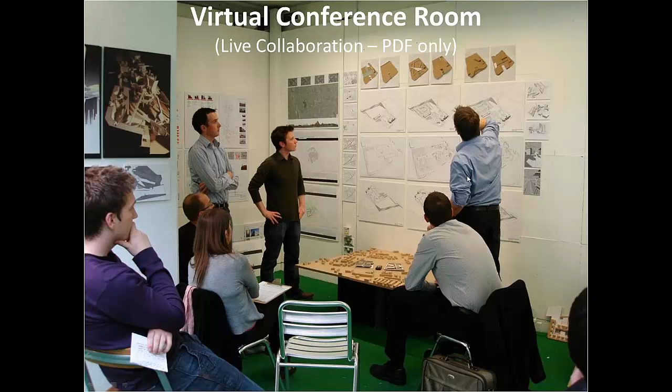In the case of a studio session, this gentleman could be in New Orleans, this lady could be in Boston, this gentleman could be in San Francisco. We're all coming together virtually on the cloud to do the same things we would do inside a conference room. And just like a conference room, we can meet simultaneously and interactively markup documents live and see what each other is doing.

Or we can leave the conference room, or leave the studio session, and the documents that are part of that studio session will remain there, and people can come and go as they please and make comments and markups on various documents.

And it doesn't matter whether we're meeting interactively together or doing it in this asynchronous way—whoever said what, when, to any of these documents is captured, tracked, and made part of the PDF for future uses. Just a brief summary of some of the markup tools available, in this next series of slides.

There are obvious things like placing text and using pens and highlighters. You can place clouds, and what they call call-outs, which are clouds with notes associated with them. You can establish stamps like 'release for construction,' 'not to scale,' whatever you want—you can create a stamp for that.

There are powerful measurement tools, so if you open a PDF document that has some dimensions drawn on it but wasn't plotted to scale, you can calibrate a scale by simply clicking on the document and saying between here and here is 15 feet. It will remember that as you begin to do square footage calculations, perimeter measurements, or area measurements. You can even add a Z depth to do volume calculations in addition to area calculations, and so on.

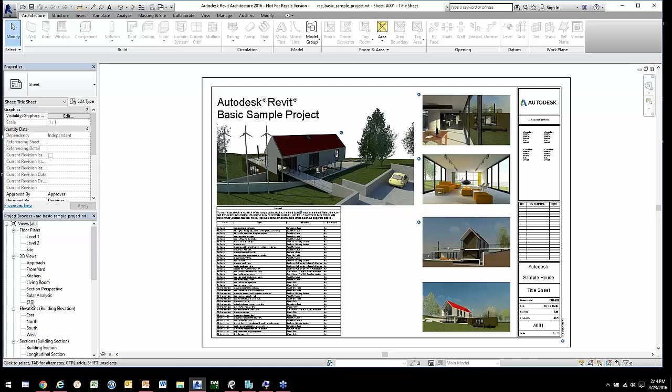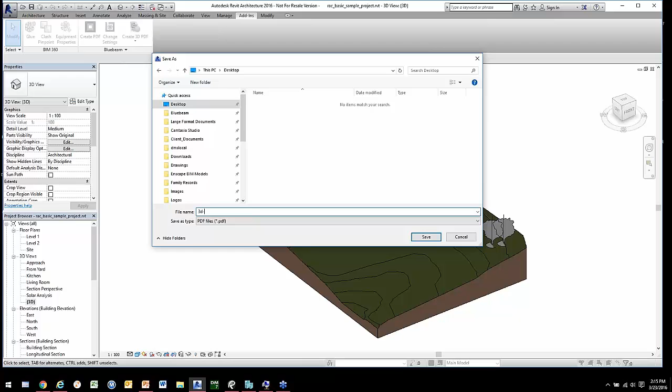So in here, I'm going to go to the 3D view and show you one of the first integrations with Bluebeam and Revit, and that is the ability to extract a 3D model as a 3D model. If I go to add-ins, all I have to do to create a 3D PDF of this is simply go to the pull-down menu and say create a 3D PDF. It's going to say where do you want to put it. For my purposes here, I'm just going to shove it on my desktop for now, and I'll say that this is going to be a 3D model, and I will generate a PDF of that. Now, this is a true PDF. It could be sent to anybody, but it is being written to my desktop as we speak right now.

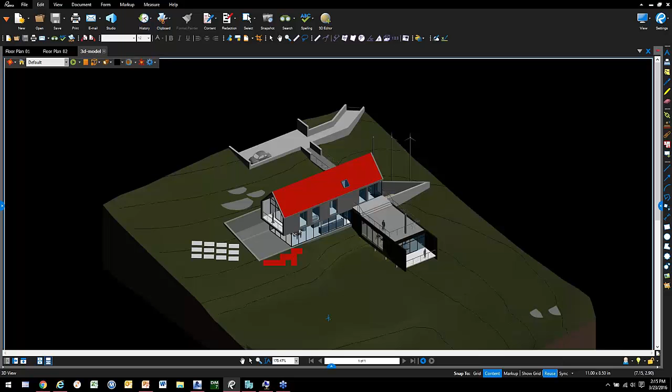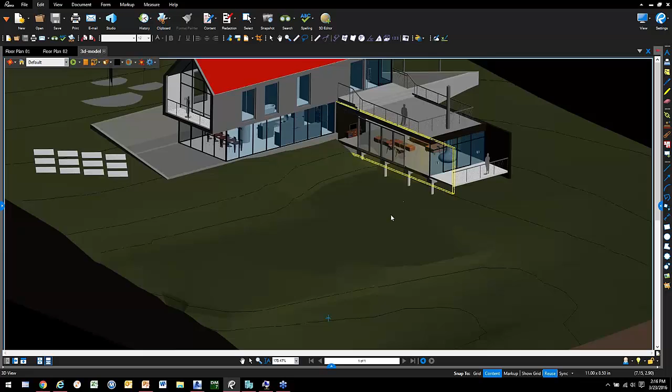Now, I've done some testing with this, and just for your information, what I've seen as a general result is this 3D PDF is roughly 25% of the size of the original RVT file. All right? It is fully rotatable. As you can see here, I'm spinning this thing around, in and out, and zooming in and so on. It also has capabilities like, for example, I can click on any of these objects. I can right-click and say I'd like to hide that object, so that as I am zooming in and out or trying to see inside of the model, I can very selectively choose what it is that I'm after. And it also has the capability, I'll zoom out a little further here, to do things like cutting planes.

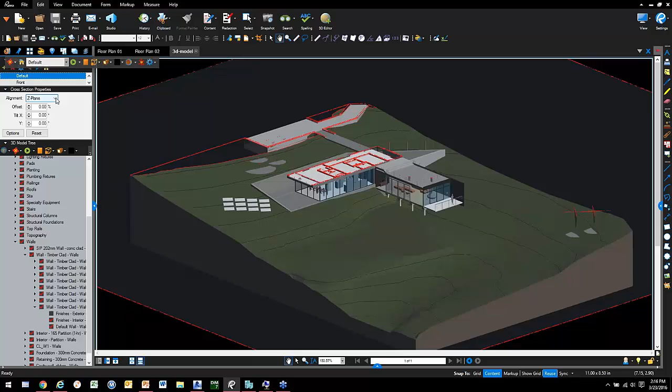What I'm going to do is turn on the cross-section properties, and you see it's automatically going to a Z value plane, and then I can move that up or down depending on where I want to cut through the building, or I could change that to an X plane or a Y plane, or you could do what they call X flipped, so that you can see it the other way around,

and again continue to cut these cross sections through it. And then any one of these images that you see here, you would be able to right click on that and say that you'd like to do a captured image of that. Say perhaps you want to email a graphic of that.

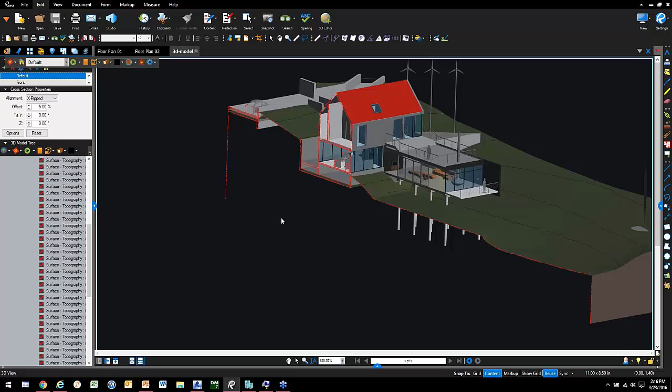A lot of people are unaware of the fact that you can mark up a 3D model using these utilities. So if there was something about, let's say this ottoman, this brown ottoman here, I can place a cloud around that, and I can place some text associated with that, and I'll say replace with leather, for example. Now, that markup is part of this 3D model here.

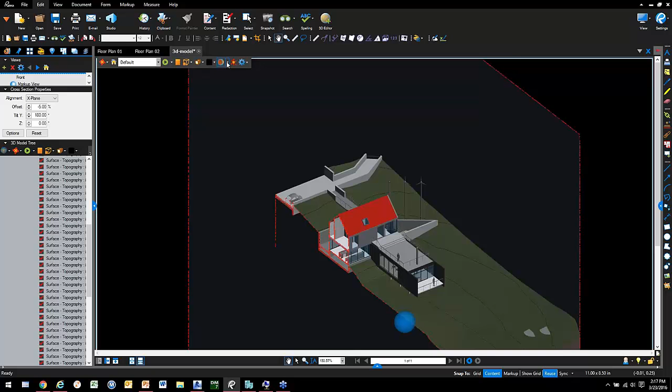So if I go back to the standard view and I choose to turn off, say, the cross sections and so on, notice how my markup, if I zoom in and out or rotate around, my markup becomes this blue sphere, and there could be many of those throughout the model.

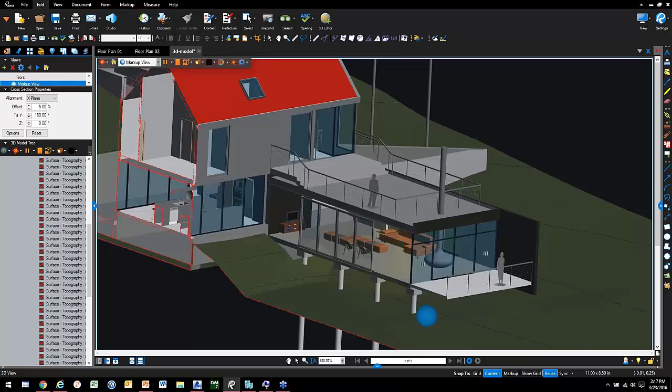The way Bluebeam Revu works with this 3D model capability is if you click on the sphere, it automatically remembers the view orientation and all of the view settings that were enabled when that markup was created, and it will automatically reorient the model so that the attention is immediately drawn exactly to the comment that was there.

And like any other markup, it is listed in the markup list as to who placed which comment when it was done, and then there's a whole series of variables that you can associate with it to do material takeoffs and responsibility lists and so on.

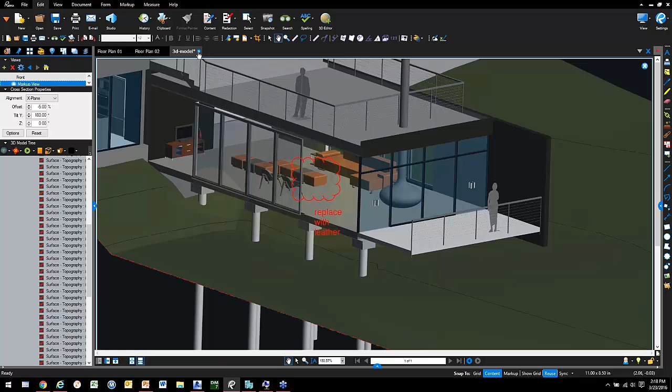But that's just one example, and I'm really not even going to keep this 3D model. I'm just going to kill it here and say, would you like to save it? No. And this is a floor plan that's already open in Revu. Now, I'm going to go into another model in Revit. First, I'm going to pop over here and just kill the entire session.

This drawing came from a Revit model, but instead of dumping a 3D model, I went to the floor plan view, and I said I'd like to extract one of these floor plans. And then from there, I began to mark it up with room lists and punch list symbols.

And if you're using the iPad version, or even the desktop version, if you've captured photographs that are on your hard drive or accessible to you, when you're doing your comments and markups, you can also include graphics. And in this case, the punch list said there was a wall tape joint visible that needed further work.

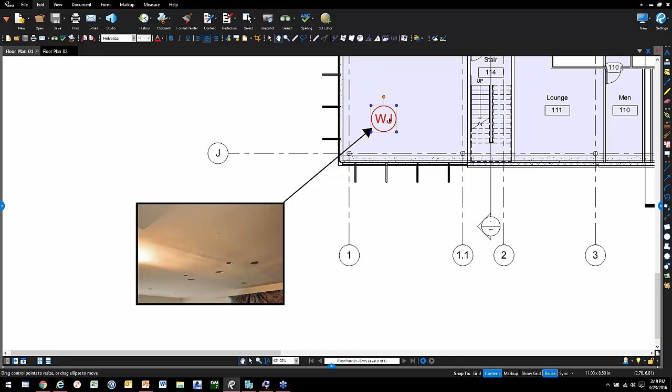If I go to the properties of that markup, that's been assigned to a contractor called Johnson's Drywall, and I've even included a photograph of the problem that I need this particular contractor to deal with. And then again, this is a standard PDF that can be shared with anyone.

So if I chose to do so, I could simply say, let's email this to whomever, and I can go into my distribution list and contact list, and I can say, I want to send this out to Johnson's Drywall. But more likely, what I would want to do is maybe my email says, hey Randy, we need to talk about this.

Tomorrow at 2 o'clock, meet me online in one of our studio sessions, and let's talk about it interactively and decide what to do about that, and we'll do that in just a minute. The other thing I wanted to do was show you how I generated these floor plans from a Revit model and how easily you could do it as well.

So I'm going back to Revit. I'm going to minimize Revu here, go back to Revit, and tell it to open a different RVT file. Now, while it's doing that, I am going to pop up my browser here that is already running in the background, and I'm going to point that to a URL, and let me cut and paste that in there for you.

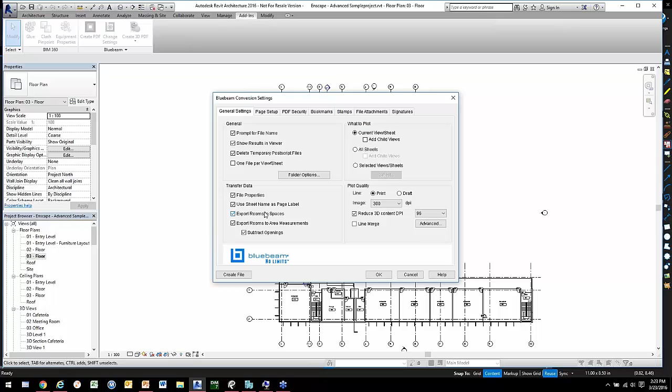Or you can have it done automatically, which is what I'm doing here. I'm saying not only bring over the rooms as spaces, but also do area calculations at the same time. So I'm simply now going to say create a PDF of this, and it already knows that I've done some others from this model, and it knows where I put them. So it's simply asking, where do you want to put this thing?

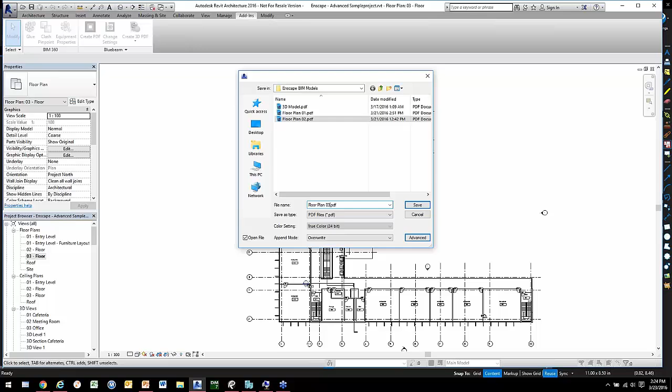And I'll put it down here, and I'll say that this is floor plan 3, which we're doing live, and now it's going to process that, and it's going to create a 2D PDF of that floor plan with all the information that was necessary. Now, as you can see, it's already done the area calculations, and if I scroll into here, for every room, there is an area measurement, and it knows that this is a metric version of this model that is working in millimeters. Obviously, you can put it in whatever you want.

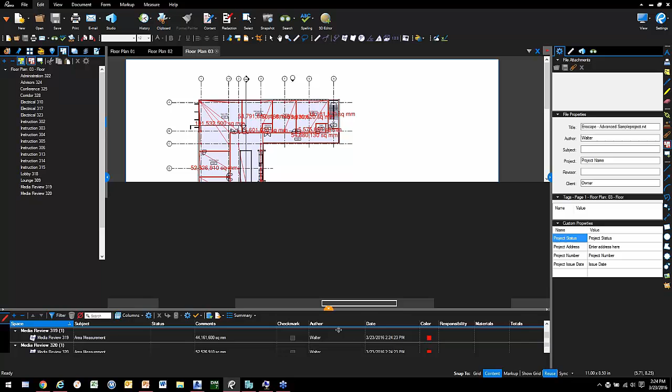But I don't want to see those area measurements. So what I'm going to do is I'm simply going to do what they call a lasso, and I'll grab all of those area measurements, and I will create a new layer to get them onto a new layer. I'll call it square footage, or you can call it whatever you want. And then under the layer window, I can choose what I want to see or not to see at any given time.

Now, over in the floor plan for level 1 and level 2, I've already placed a room list, and I've already created this legend inside of the file itself. That's one of many things that you can do, and we're going to do that live here in just a second. One of the other things you could do is, if you needed to run a report of, let's say, this wing of these square footage calculations and rooms and so on, in addition to popping up a legend, you can also go here and you can create a summary report in either a CSV, XML, or PDF.

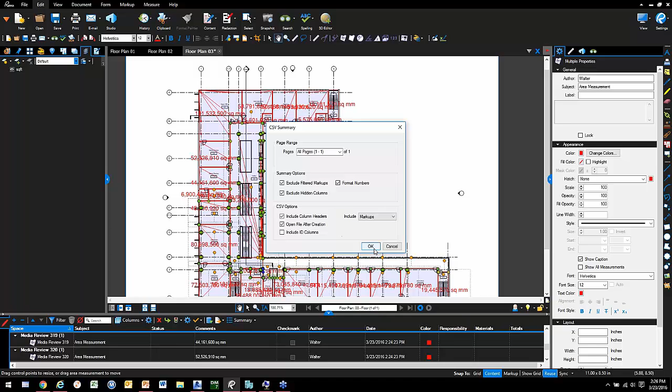There's various types of formats you can go to. I'm going to go to CSV. I'm not going to bother to modify any of the standard columns, although all of that can be configured. I'm simply going to say dump these selected area measurements into a comma-separated file. It'll ask me to verify various choices that are available to me. Again, I'm going to dump it on the desktop.

It's creating floor plan 3 CSV, and as soon as it is done doing so, it opens up in Microsoft Excel. And then I can take any column, any piece of information, I can sort it, I can change the column orders, I can add additional information, and do whatever I want to this report before I save the file and then share it with my management or whoever needs it via whatever methods are available to me.

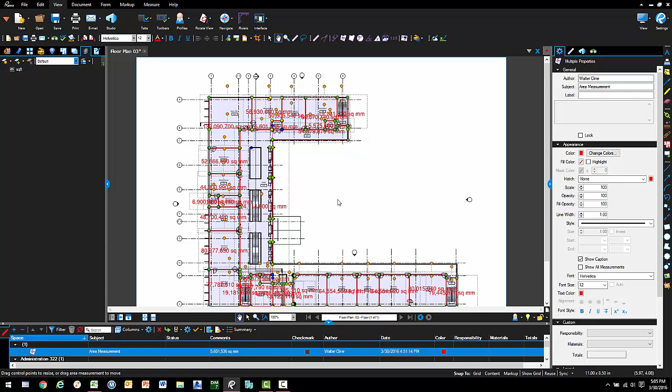In those other documents, I have already placed these rooming lists, and what I did is there's a series of things in Revu that you can save, any kind of markup that you do as you're doing it. Let's say I place a cloud from here to here. That cloud has now been stored in my recent tools, and I can choose to use that cloud again, and I can place a different shape of it, or I can double click on it and place an exact copy of that cloud, and you can do that with any markup that you're putting into the drawing. Well, this rooming list is a markup like any other, and I have stored it into one of these tool sets for use later on.

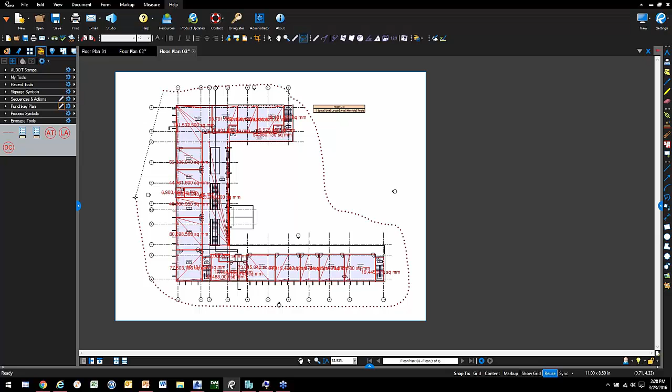So what I can do then is I can simply say I'd like a rooming list here, and you'll see it comes in as the original graphic that I saved, but when I click and let go, it is waiting to be associated with the spaces and rooms of this drawing as opposed to where it was generated. So again, I'll use that lasso tool, and I'll just come down here and grab all of these rooms, and when they're highlighted, I'll right click and tell it that I would like them associated with that rooming list legend, and now this has been updated to have all of the information from this file as opposed to the original from where it came.

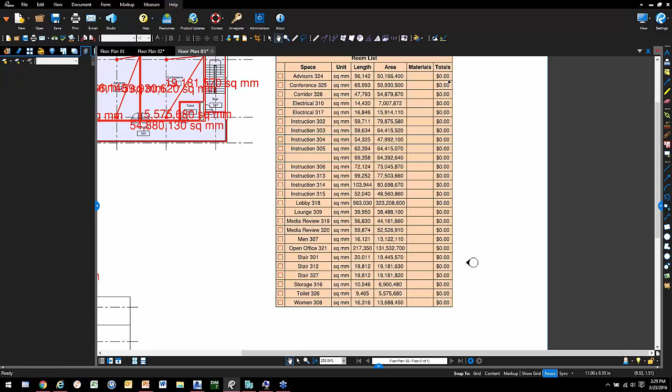Now here you should notice, I'm going to zoom in over here. You'll notice some of the materials and totals are blanked out, whereas they were filled in the other documents. That's because somebody went through and either collectively or selectively told that this corridor 328 is based on hardwood, and this electrical room is based on tile, and this electrical room, the flooring is based on concrete. And each of those materials has a value associated with it.

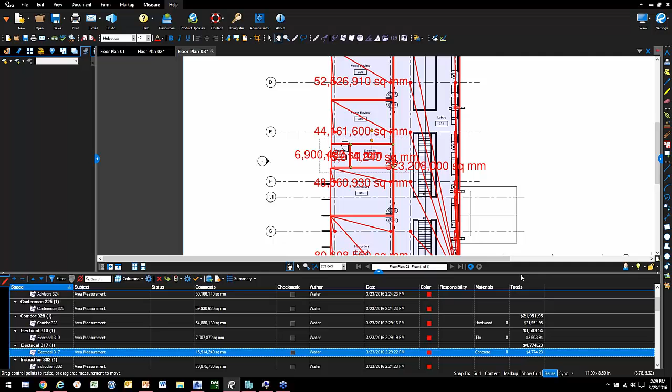So as you're telling it the material type, it's automatically adjusting your rooming list or your room schedule to have the length, area, materials, totals, and so on, all of which is modifiable by selecting the legend and going to its document properties and changing all the properties over there.

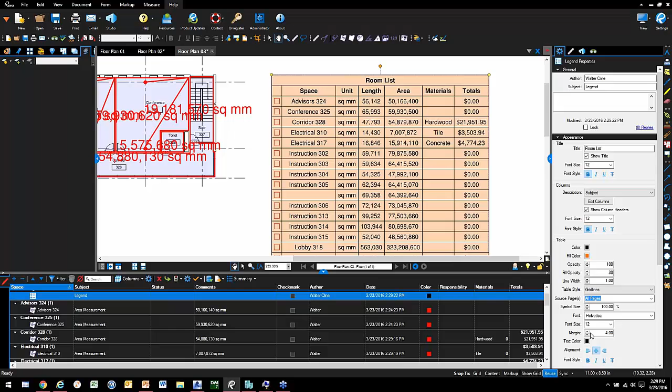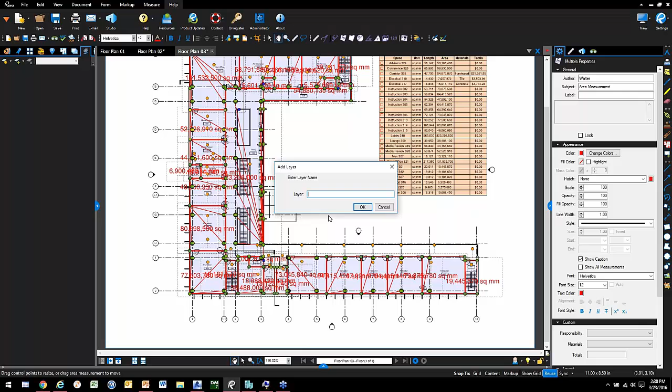In addition to that, I'm going to, again, real quickly, and then we'll move on to the studio session stuff. Here, I'm going to real quickly put these on a new layer. When Revu got confused previously, it lost that layer that I had done before, so we're just getting that out of the way.

Now let's say I want to use these tool sets here, and I want to do some markup, some punch list type of activities, like the door closer in this particular room is not working properly, and the door closer in this room, and the door closer in this room, or we have another one of those tape wall joints over here and over here and over here that need to be corrected as well.

Well, I have more than one legend template. I've created a legend template here for punch list, and now I would simply do the same thing I would do with the rooming list. I would simply do a selection of the various punch list symbols and tell it I would like to have them associated with the punch list legend that's on the drawing.

Again, totally configurable. From here, I can go into the markups and begin to assign responsibilities. This is a wall tape problem, so that's going to go to Johnson's drywall. If I scroll down, we'll see the various other ones that are here. In this case, this is a door adjuster that needs to be corrected, so we'll assign that to Grady's door, and so on and so forth.

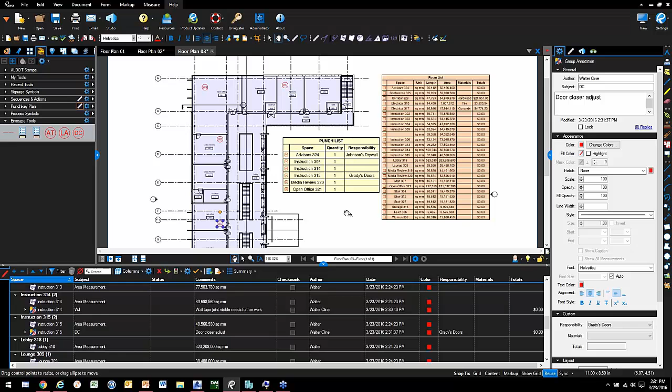It will also, if I continue to add punch lists, now that the two are associated together, it will continue to update. If I put two door closer punch list symbols inside of the same room, it would do a cumulative quantity. So it would say within this room there are two of these things that need to be addressed by Grady's doors, and so on. It's a really neat feature of taking things out of Revit and bringing them into Revu in order to do these types of calculations and activities.

Now let's see, I do have some more questions. Let me click on those. Okay, I will be covering, for the questions I'm seeing here, I will be covering that in just a moment, so I will address it at that time.

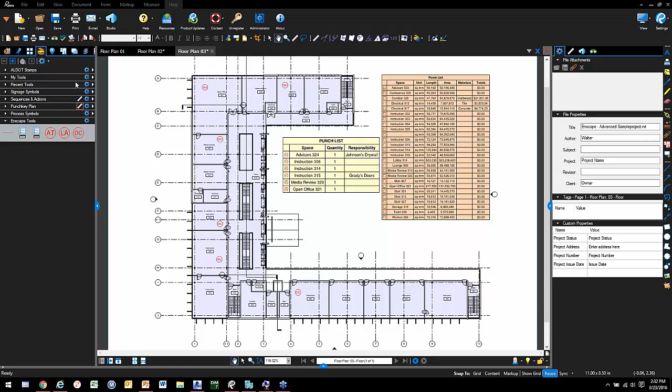All right, now some of the other things you can do, what I want to do here is go into a series of pinned project locators where you can easily regain access to projects you've already been working on. I don't need floor 3, I'm not going to bother to save it, or floor 2, or floor 1. I'm going on to a completely new project here.

This is also a project that I downloaded, and it came with a series of floor plans and a series of elevations and sections and 3D, 2D PDFs of 3D images and so on.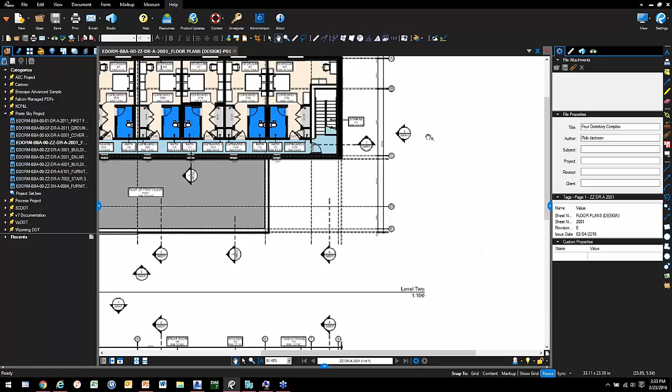Using the markup utility called Auto Hyperlink, I told it to look everywhere there was an elevation or section detail with a value of A4001, and what it built into the PDF automatically are these hyperlinks, so that if I click on that detail or elevation link, it will not only take me to the correct document, it'll take me to the correct elevation within that document. This document has elevations 1, 2, 3, and 4. The one I just clicked on was obviously 4.

But if I slide in over here a little bit closer, you'll see that this is section number 2, so it goes to building section number 2. And if I come back over here and say that I would like section number 1, it's the same document, but it's now changed its view to section number 1 and so on. So those hyperlinks are really valuable capabilities there.

You can manually put in your own. I've pasted a hyperlink here that says if I click on that piece of text, take me to whatever that stair detail is. So those are some of the various things that you can do there.

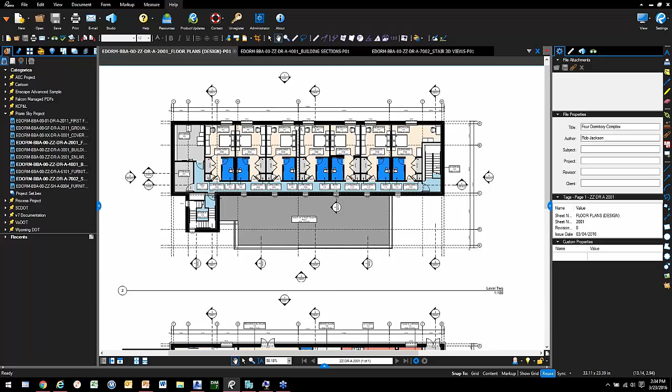Now, some of the other things you can do that I think are really valuable is you can build your own tool lists here, not just from markups, but from content from the drawing itself. Let's say that this chair here, I think we need more of those in other rooms.

One of the things you can do is you can go to Edit, and you can do what is called a snapshot. With this snapshot going, what I'll do is simply click and place a rectangle around that object, and it has now extracted a copy of that object that I could then paste back in wherever I want to.

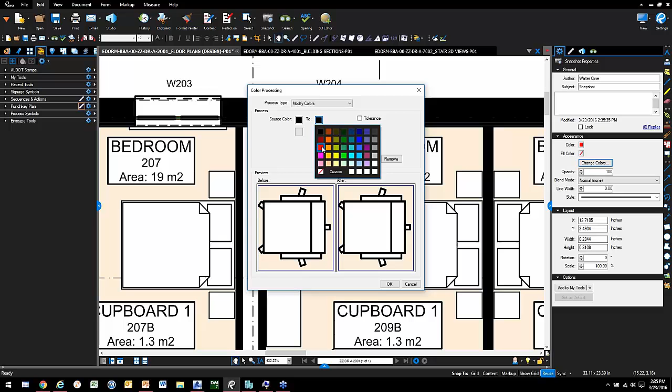Now, I don't want to place copies of it exactly, because if I generated this from a Revit model, I want to be able to tell the difference between the ones that I extracted and the ones I added manually. So one of the things you can do is, while it's selected as a markup image, you can change the color. I'll say I want the black part of this to become red, and I could remove various things, but red is good enough. Then this I can add to any of these tool sets over here.

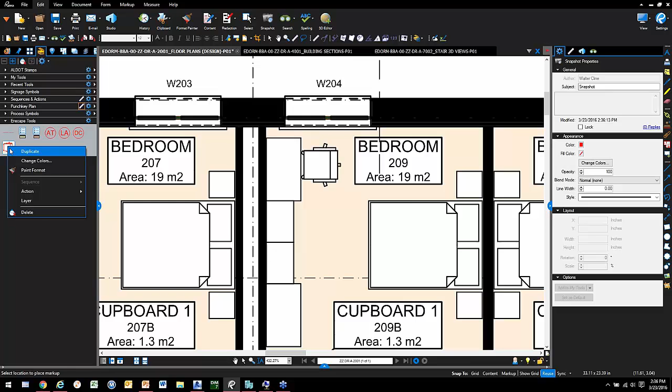So if I right click and say I'd like to add that to my Enscape tool set, now what I have is, in addition to what I had before, an instance of this chair. Now I can kill that, and then from here I can change various attributes about it. But I can use that symbol later on.

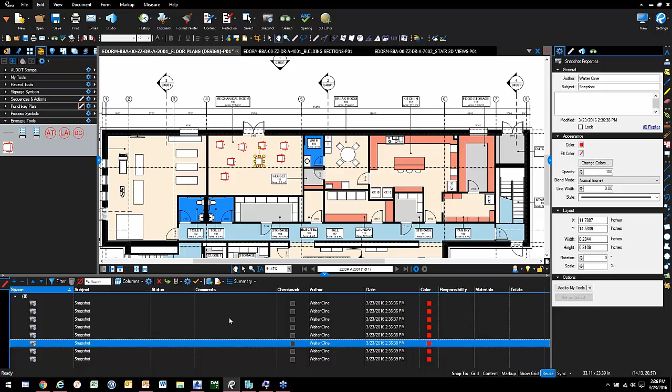I can come in and say that, in this area here, I think we need 6 of these. Now the beauty of that is, when I come to my markup list, those are also there - right now it's just taking the default value of snapshot, but we could change any of these column subjects, status, comments and responsibilities, and all of that would be up to date with these additional items we put in.

In fact, some people who use MicroStation with Revu - MicroStation has the ability to plot a cell library, to create a drawing that has all the symbols from a cell library, the block symbols, what they call cells, in the drawing. That can be plotted to PDF and brought into Revu, and you can very rapidly recreate an entire cell library of MicroStation symbols inside a Revu tool set.

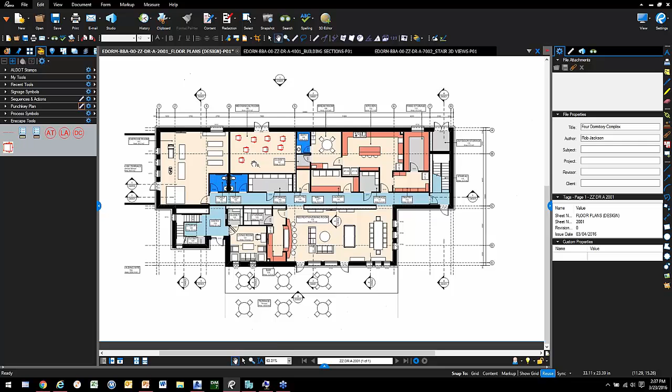But ultimately, what we're trying to get here is to communicate this information with other people. So what I'm going to do is take the stair detail and this floor plan, and go open one of these cloud-based collaborative sessions.

To do that, you simply go here and connect to the cloud server. Now the cloud server I'm using is the Bluebeam corporate public cloud server, and it's available for anybody who has Revu to take advantage of it.

However, if your company, agency or school would like to have their own behind-the-firewall cloud capabilities for specific people, you can do that as well. I'm simply using the one that's provided out of the box.

Now, as you can see, I've already got various sessions running. I've got multiple projects active, and what I'm going to do is just start a new studio session that I can allow people to come in and collaborate with me.

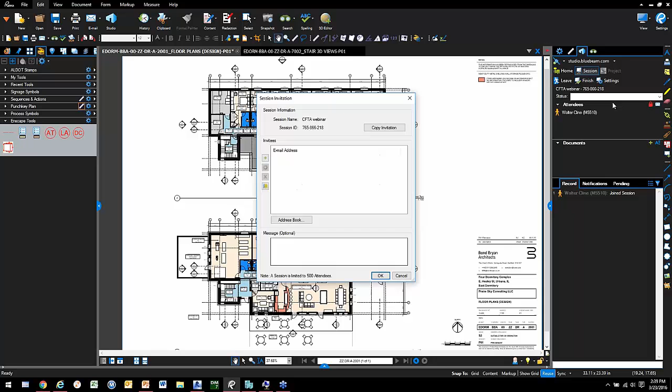So I'll call this session CFTA webinar, and typically you would restrict access to only invited people, but I'm going to open it wide open right now so that anybody who wishes to join this session, who has Revu or Vu, either one - all they need to interactively participate is this session ID.

Now what I'm going to do is take this document here and save the chair changes we did, and tell it I'd like to open that into our studio session. In essence, I just pinned it on the wall in that virtual conference room so anybody can see it and comment and mark up on it, as long as they have access to the studio session.

And I'm going to do the same thing with this stair detail - bring that over and make it accessible to anyone as well. Now, if you'll bear with me just one second, I'm going to let a couple of people log in online to collaborate with me on these particular documents.

So what I'm doing is I grabbed a laptop computer, and I also have an iPad running over here - I have Vu on one of them and Revu on the other - and I'm simply going to go online through one of these other machines.

Now this could be a user in any city, anywhere on the planet, or even on a plane somewhere between cities, and all they have to do is say they want to join this session and key in the ID, which is 765 866 218.

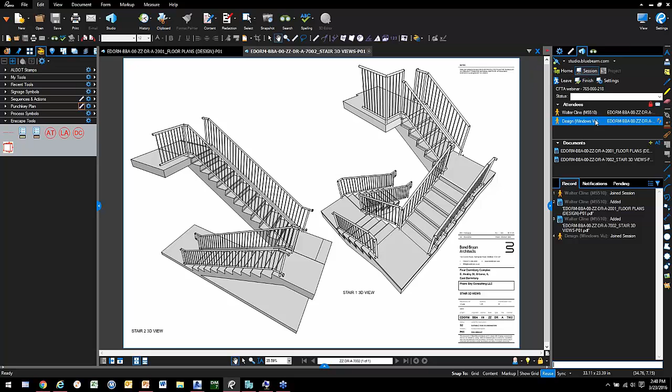And as soon as they do so - here, we'll click on that - you'll be able to see that not only am I participating in this studio session, so is somebody else, and what that person is using is just Vu on a desktop. But because they're connected to our studio session, it inherits the capabilities, and they're able to participate.

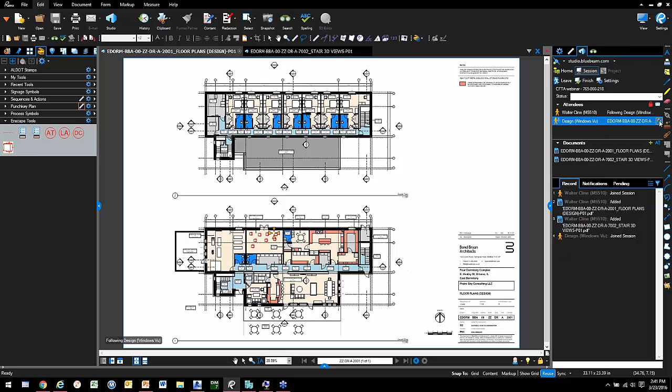So what I just did is I clicked on those orange feet over there, and what that tells Revu is that we'd like to follow the person in the field we're communicating with. I'm not doing that on my machine, they're doing it, and I'm able to follow them around, which gives me the ability to see any markups they choose to put inside the drawing.

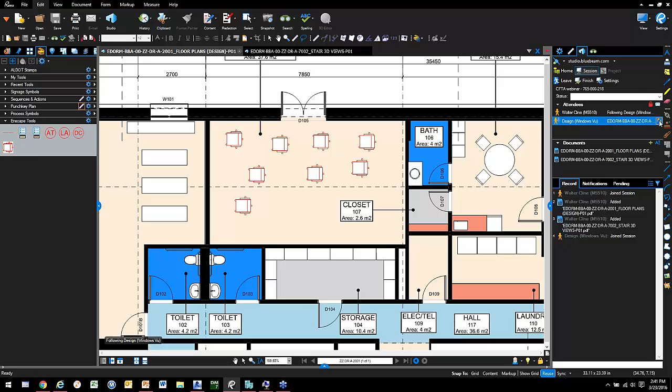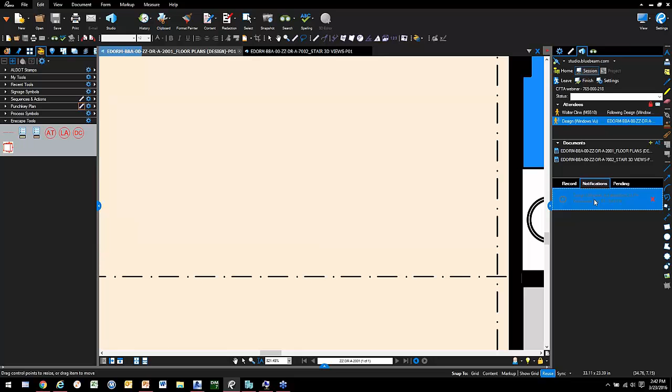There they placed a cloud, and here they've placed a red circle around that for some reason. They can even grab one of their markups that they really want to draw my attention to and say, I want to alert another attendee, and when they hit OK, my notifications section starts flashing down here, indicating that this person has placed that red line and really wants me to pay attention to it.

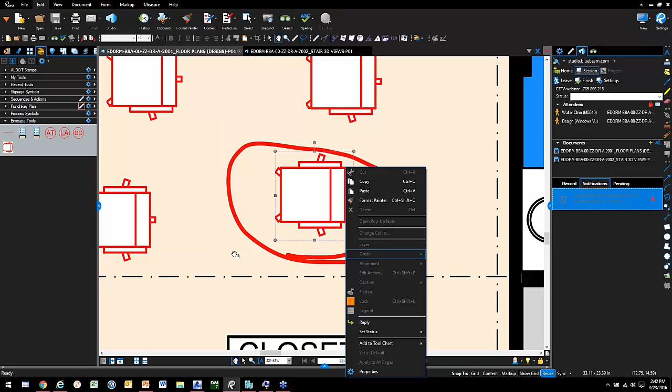We can be on the phone talking to each other, doing this interactively or in a synchronized way. If I disagree with whatever comments they put on there, I cannot change this person's markup, because when we're in a studio session, what he or she said is sacred, and what I say is sacred, and we're kept away from each other. However, I can grab any of their markups, like this one here, and reply to it, saying I disagree, for these reasons, let's discuss next Friday, and so on.

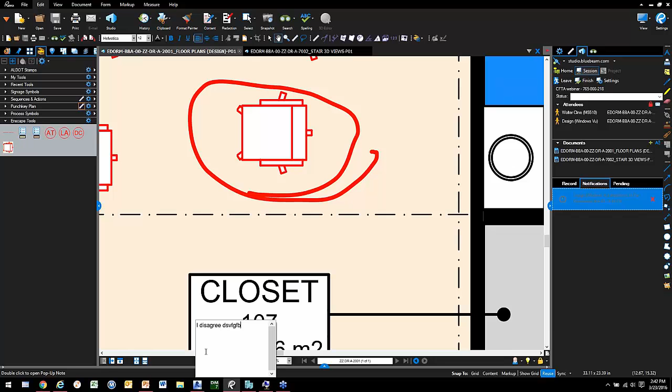Now, here again, as I go into the markup history, it knows that person placed that cloud and that person placed that callout, but it also knows that I placed a reply saying that I disagree, for whatever reasons.

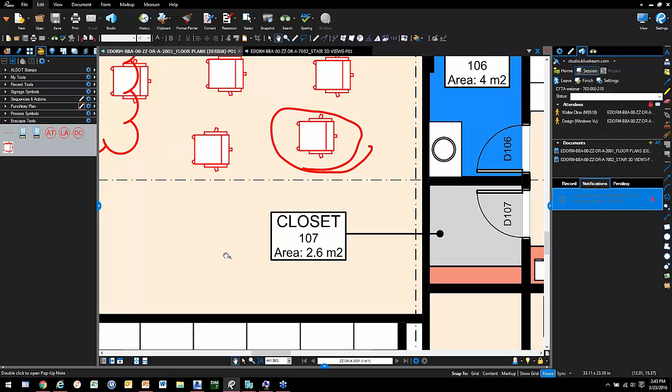Now, this could continue for weeks, or it can continue for a few hours. You can put a deadline where the online session ends next Thursday at noon. There's all kinds of things you can do inside of this.

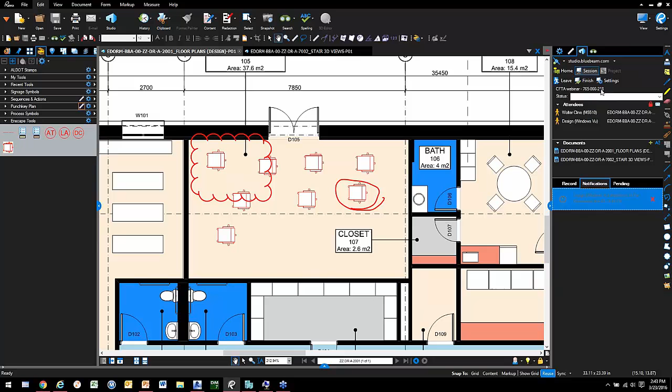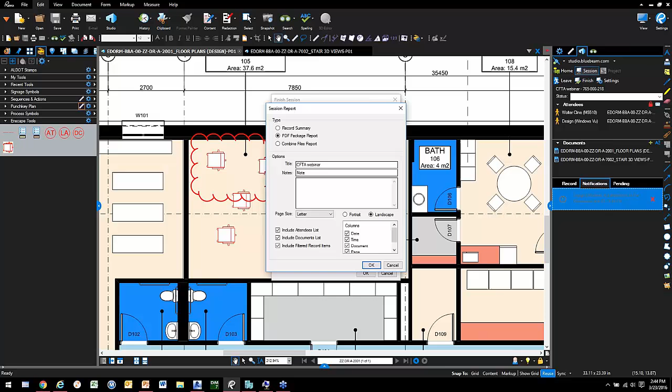But let's say we're happy with the comments we've done so far. The person hosting the session can at any time decide to finish it and decide what to do with the markups. Here, what I'm going to tell it to do is take these new markups and just put them out on my desktop, instead of overriding or not saving the changes at all. Another thing I want to do is create a summary report which shows me who did what when, and I'll say I want to create a PDF package version of that, and hit OK.

All right, and now the session is being closed. Anybody who was online has now been notified that these files have been downloaded and the session has ended. On my other computer, I've just now been kicked out of that session because it's simply no longer valid.

Now this is what it created—I'll get out of Revit, which has been running in the background all this time. It created the 3D model that I saved previously, and then it put these new documents down here. If I double click on any one of them, that will open them back up in Revu.

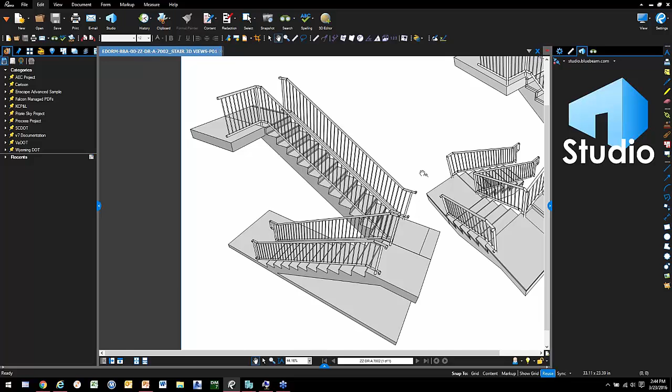Now, we didn't really do any commenting on the stair, but if we go to the plans one, we'll see down here that the cloud and the markup and the chairs and all those various things are there.

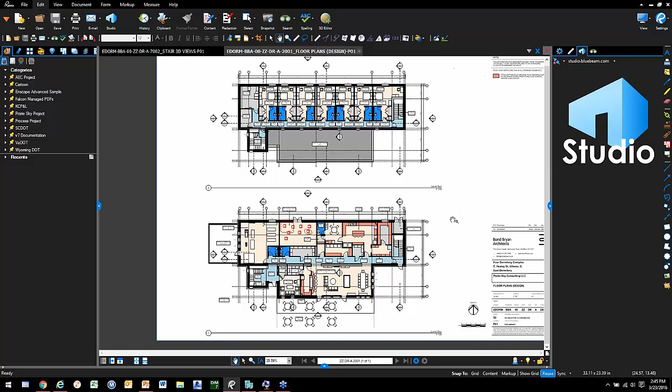Now, the last part of this was to round trip it to feed it into a GIS system. There's lots of different ways of doing that. What I'm going to focus on here is how our customers who are using GIS would do it—all of our customers doing GIS maps for various industries: highway departments, college campuses, utility companies, petrochemical companies, and whatever, when they have a graphic map like this campus map here.

When they go to one of the objects and ask to tell me more about it, that's being fed by our document management system. Here's a result where I simply clicked on a building and said give me whatever you got. This one here is called Wistar Institute, and if I say give me every document you got, it tells me it has 8 documents, all of which are TIFF files right now with various forms of metadata associated with them.

In that scenario, all you have to do to feed your GIS system is drag the document into the project folder and it will do it automatically. So what I'm going to do here is go to the University of Pennsylvania, down to the Wistar Institute project folder, where those 8 TIFF files are now, and I'll take these 2 PDFs we've been working on.

I'll just drag and drop them in there. It says you're going to move those there. Is there any particular information you want associated with it? I'm going to change my environment real quick to the University of Penn environment so that I have the proper metadata I need to make all this work.

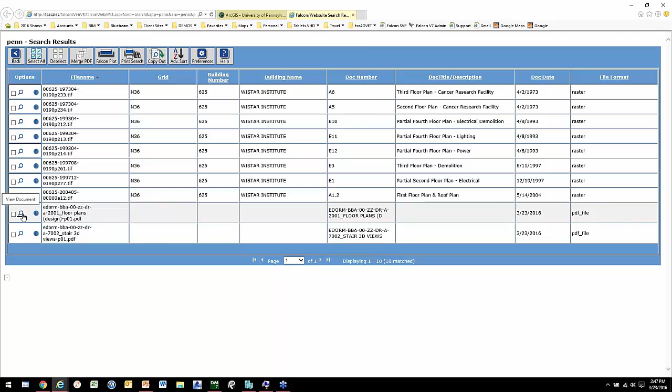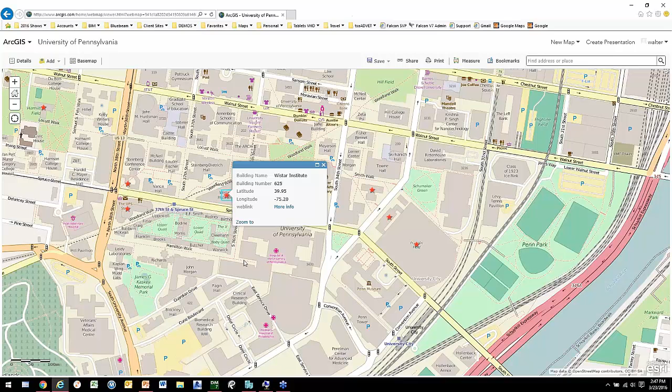So if I now come back over here and choose the building and say, what do you have available to you, not only do I have the 8 TIFF documents that were there, but now I have these PDF documents that were modified and adjusted based on the studio session. And if I click on that, it will open it up again, and you'll see that all the information gathered and embedded into the PDF is instantly available to anyone who has access to that particular GIS map.

Now I'm going to wrap this up and go back to look at the Q&A list. One of the questions is, can you also save out as a PDF-A, an archive PDF? And the answer to that is absolutely you can.

When you're working in Revu and you have a document open, say for example this one here, when you go to save, you could do a save as, and there's a whole slew of file format types, one of which is PDF-A. You can also take a PDF or information from a PDF and bring it into Word or Excel or other applications as well.

One other question is, which document management solutions work with Bluebeam Revu? Well, obviously we hope that you would use Falcon DMS, our engineering document management system, for that. However, it will also work with Bentley's ProjectWise, and even though we don't consider it a document management system, it interfaces pretty well with Microsoft SharePoint. There are no other document management systems that Bluebeam lists as compatible beyond those 3. That doesn't mean it won't work with others, it simply means it's not on their list of compatible solutions, and you'd need to test it with yours to see if it is indeed compatible.